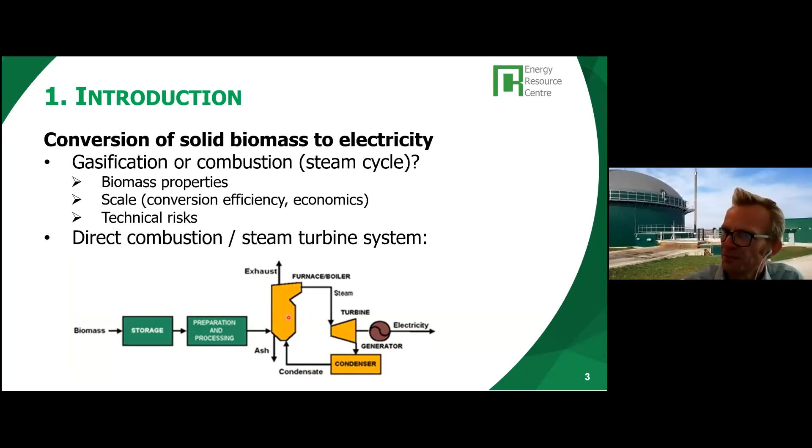First, looking at storage - this is quite important for basically any bioenergy project, particularly solid bioenergy projects, because there's always going to be a need to assure a continuous supply of fuel. In cases where biomass is produced seasonally, for example when connected to agriculture or agro-processing, you may need to store biomass for a longer period, weeks to months. There can be daily fluctuations due to transportation of biomass, which means you always need to have a certain quantity of biomass in stock, so that if there's no supply for part of the day or for a few days, the system can continue operating.

It's important to have continuous feeding of a system, and for that there's often systems for bunkering of biomass, meaning the system is automatically fed from a small storage called a bunker.

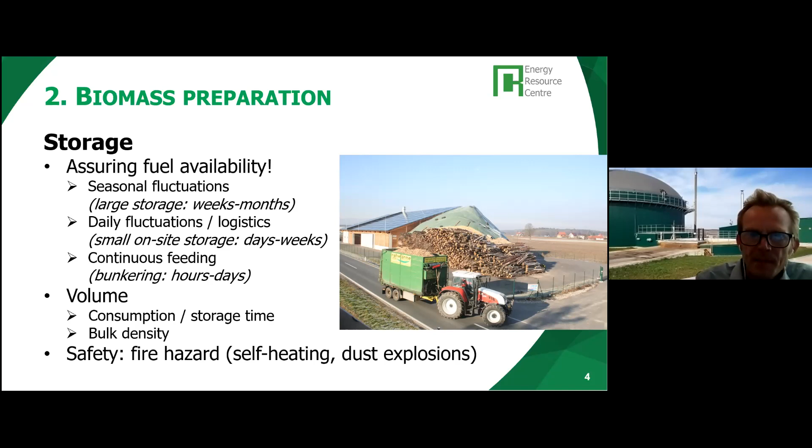Biomass preparation usually involves sizing and drying. Sizing can be reduction of size, for example by chipping of logs or branches of wood, or by milling, which is quite often done in larger scale applications, for example where biomass is fed into coal-fired power plants.

Some systems may also need larger biomass sizes, and when the available biomass is fine and dusty, it could be agglomerated, forming pellets or briquettes, which can then be fed to the combustion system.

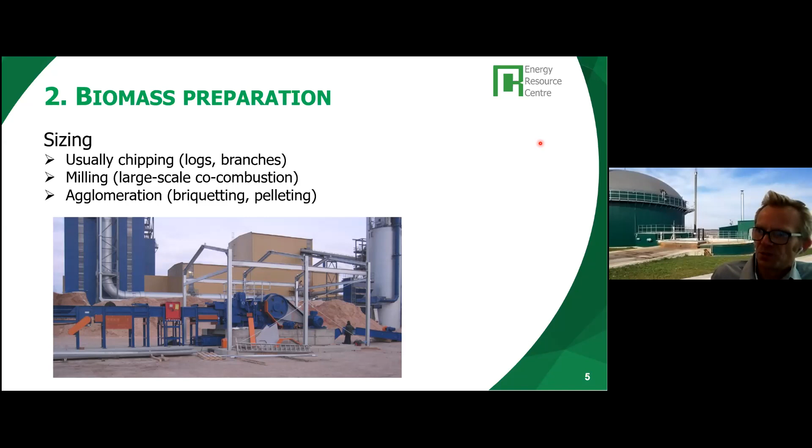Drying is not always needed for combustion systems. Depending on the design of furnaces, very wet biomass can actually be combusted, where drying takes place in the furnace as a first step of the conversion process.

Nevertheless, it can to some extent improve the efficiency, because if you have dry biomass that does not cause too much water vapor to be formed inside the furnace, you can achieve higher combustion temperatures, and you may need less energy for evaporation of the water.

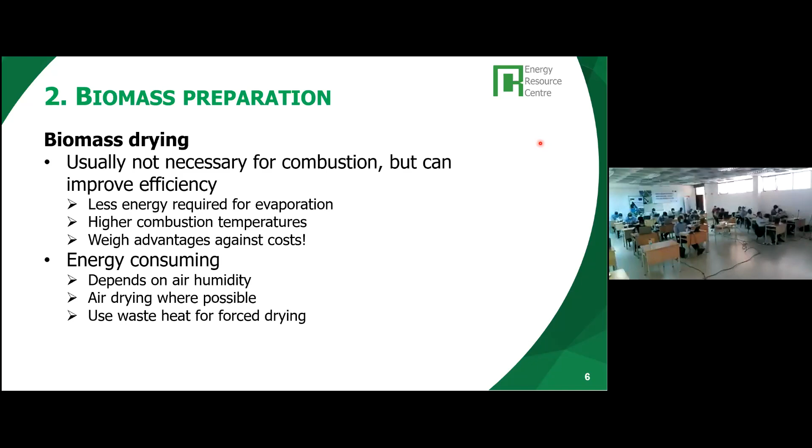It's important to always weigh the advantages of drying against the costs, because having a drying system requires either investments, or in the case of drying in the air, it requires some space to keep the biomass while it's drying.

Consumption of energy for drying: if it can be dried outside, then you don't have to do that much, and you don't consume any energy, but it goes slowly, and it very much depends on the average humidity level of the air. If you have a very high relative humidity, then drying goes very slowly, or even not at all.

If you do consider forced drying, by actual heating or ventilation, then it's best to consider the use of waste heat, for example coming out of the turbine - the low temperature heat that could be made available for drying.

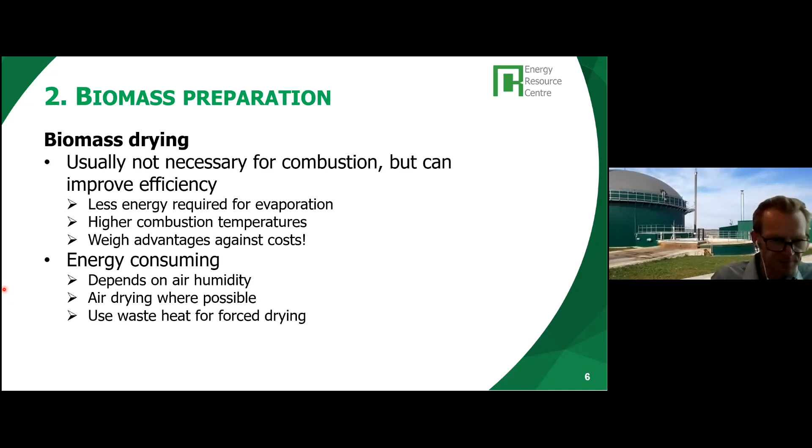The combustion process itself is a thermochemical process, where biomass reacts with an excess amount of oxygen in air for production of heat.

And with the oxygen from the air that is used for combustion, there will also be a lot of nitrogen coming in. As you know, air contains roughly 20% oxygen and some 80% nitrogen, so for every part of oxygen, there will be 4 parts of nitrogen also going into the furnace.

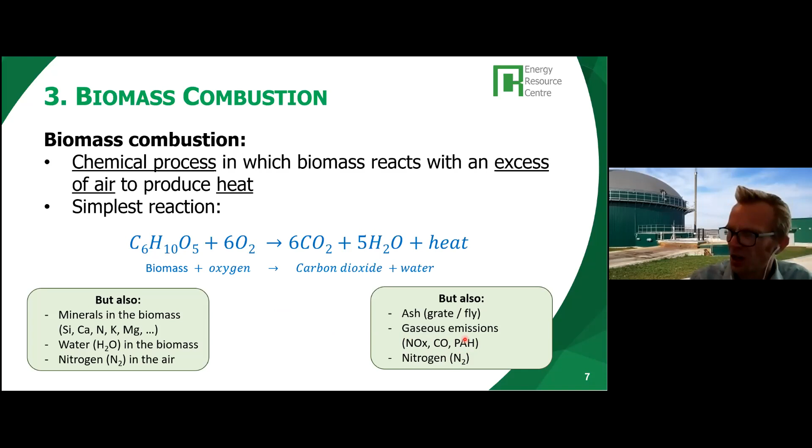Now, what do you see when biomass enters a furnace? First is the heating of the biomass, because when it's admitted, it will basically be at room temperature. What happens more or less immediately is the water it contains will evaporate.

Then the biomass will heat further and will start to pyrolyze, which is more or less the release of the volatile compounds in the biomass, and those volatile compounds will start to burn in the next step. That's the burning gases, the actual flames you see when you look at burning biomass.

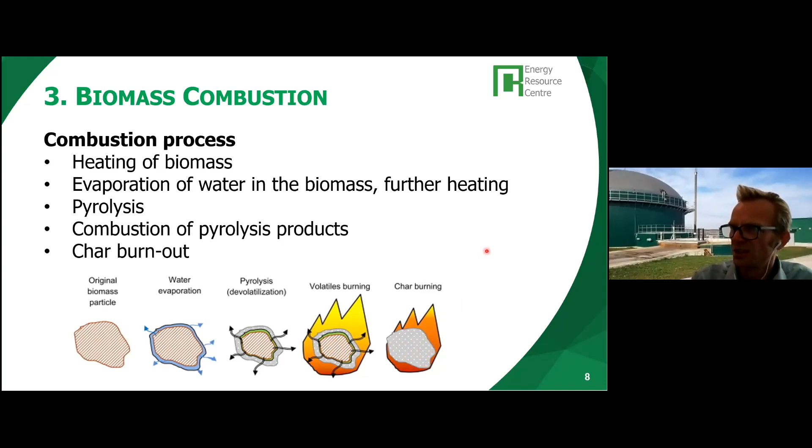Now, at some point, all the volatiles in the biomass will have burnt out, and what is left is char, and that will continue burning. That's more or less pure carbon, and it will continue to react with oxygen to form CO2. That usually takes a bit longer.

Some examples of combustion. We've seen this one in one of the previous slides - that's just cooking, usually 1 or 2 kilowatts of cooking power. A bit larger system.

This is an example for the heating of palm kernels. There you have 10 to 15 kilowatts of heating power for heating these drums with fruits. Similar power, 20, 25, 30 kilowatts, in modern boilers for space heating, used in colder climates.

Some boilers in industries - this is a boiler for cashew shell, around 3 megawatts or so. This is in a palm oil mill in Ghana, I think roughly 15 or 20 megawatts. And this is a large steam boiler in a power plant, 30 megawatts or so.

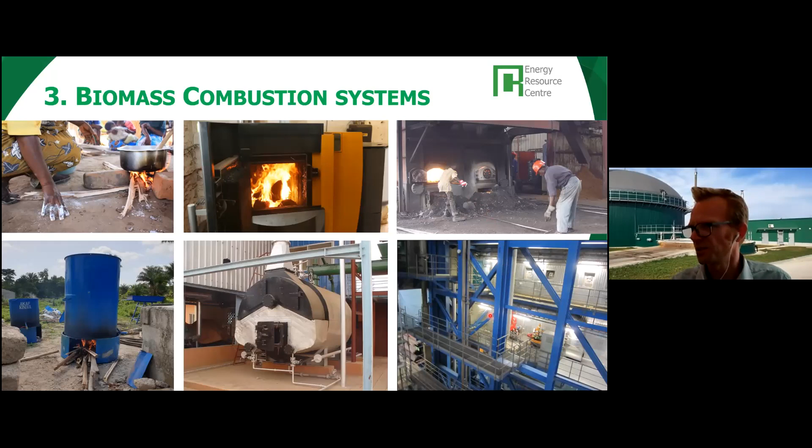What do you see in a boiler? First of all, you'll find more or less optimized conditions for combustion, meaning that the heat is contained within, so that the temperature is high, and the different stages in the combustion process can continue quickly as intended.

The fuel supply is controlled, so depending on the actual energy demands, the boiler output can be controlled by controlling the amount of fuel that is added to it. And the air supply is controlled, so you don't put in too much air, because it can reduce the combustion temperature, but you don't want to admit too little air either, because you get incomplete combustion with emissions and reduced energy output.

Secondly, you get an optimized transfer of heat from the burning biomass, from the flue gases that are produced by the burning biomass, to the boiler water. Boiler water flows through pipes, and we'll have a look at that later. The boiler is constructed such that as much heat as possible is transferred to the boiler water.

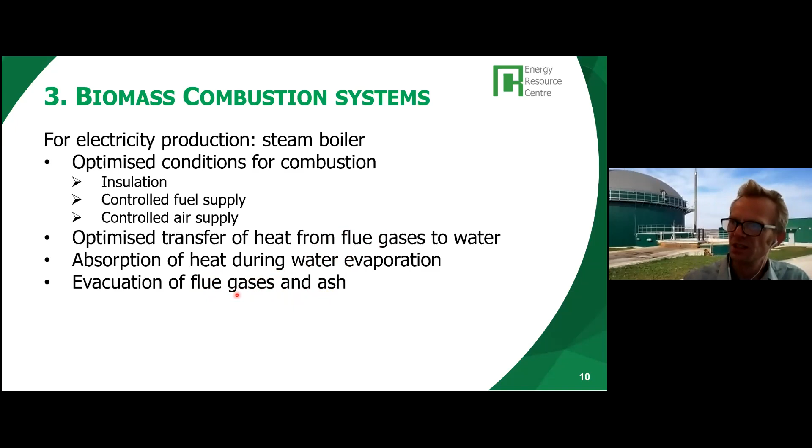And a boiler will have systems for the evacuation of flue gases and ash, both from the grates and also from the fly ash from the flue gas.

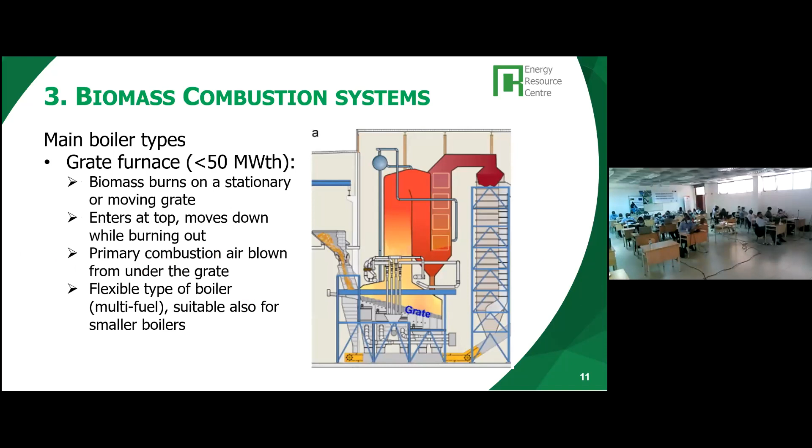There are different types of boilers. We have, on the one hand, for the somewhat smaller boilers - although that might not be appropriate to the higher end of the scale range - grate furnaces, meaning that the biomass is deposited on a grate. It can be a stationary grate for smaller systems, where biomass automatically rolls down as it burns.

We have moving grates, which can be either by moving parts of the grate, which we call a reciprocating grate, so the biomass is each step pushed down the grate system. You also have horizontal grates called traveling grates, which are more or less chain link grates on which the biomass is deposited, and which transport the biomass through the furnace as it burns.

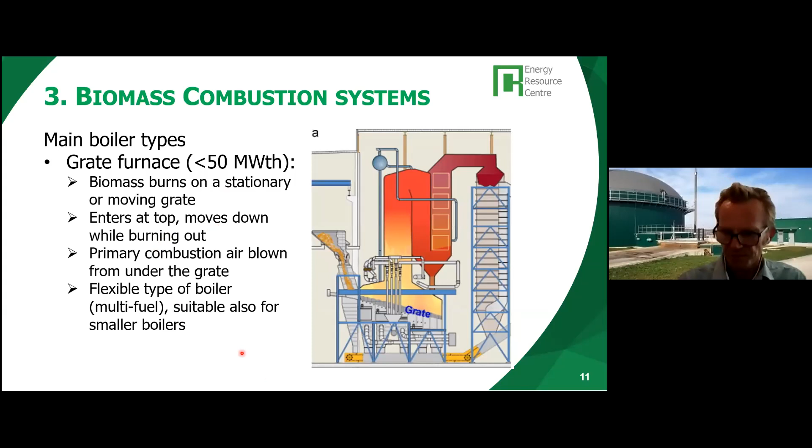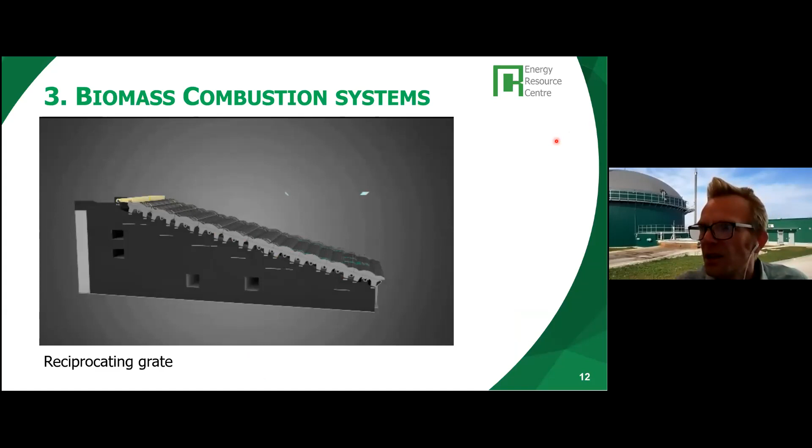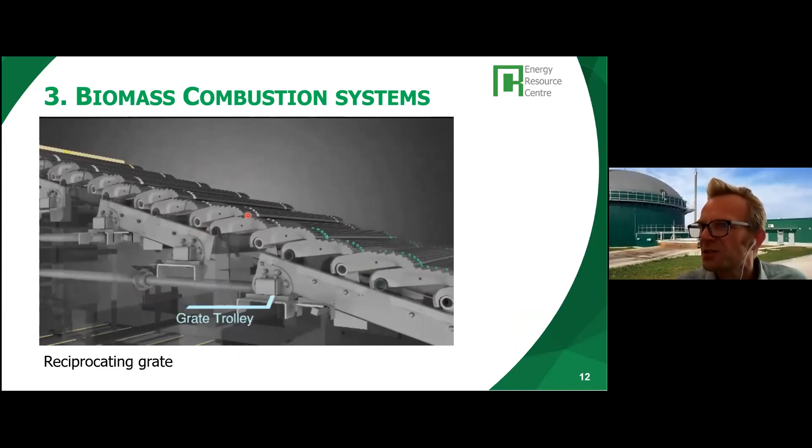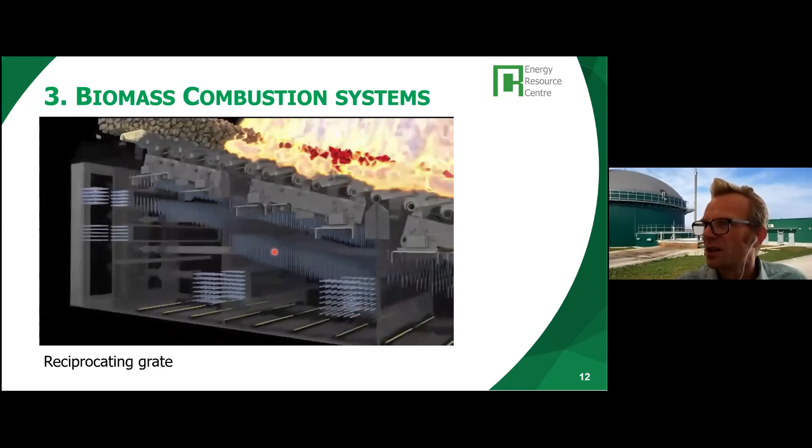This is a small video, I hope that it will be running. Yes, this is a reciprocating grate. You see the different grate parts moving on top of each other, so that once the biomass is deposited on it, these grate parts, as they move in and out, push the biomass slowly down the grate as it burns. You see here the airflow of primary air going through the system, and here you see the drying biomass. You see the pyrolyzing biomass, and further down you will see the burnout of the char.

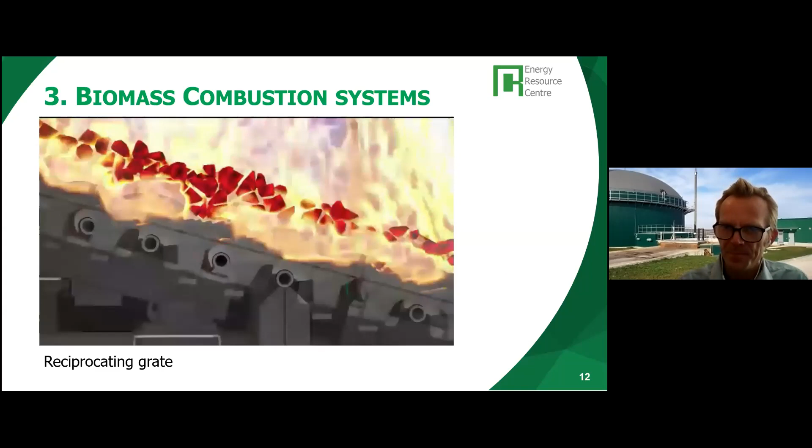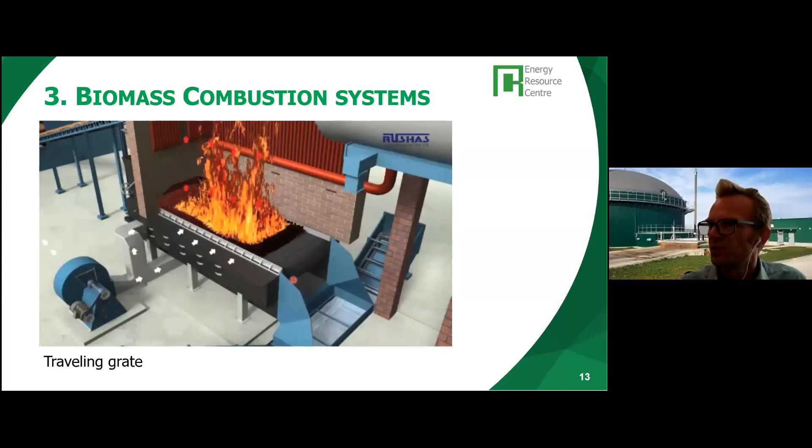And this is an example of a traveling grate. That's more or less a horizontal grate. Biomass is deposited here, just outside on top, and this rotating grate moves very slowly. You see it here as a chain, and the biomass is transported through the furnace as it burns, and the burnt out char and ash end up at the end of the grate, deposited on an ash removal system.

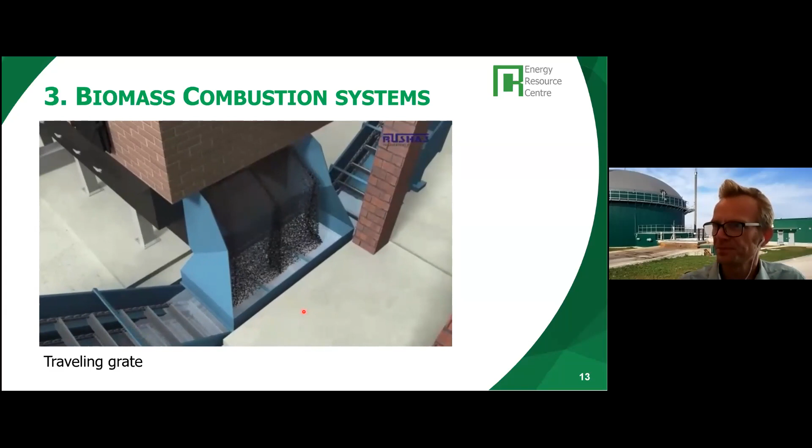Another type of boiler, in the larger segment from about roughly 10 megawatts upwards, is called the fluidized bed boiler. What is meant by fluidized bed is that the biomass actually combusts in and on a bed of inert material, which can be sand, for example, which is brought into suspension by an airflow blown from under.

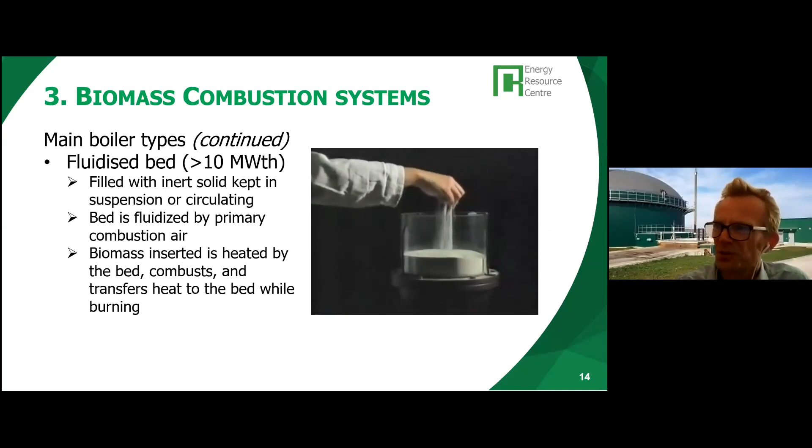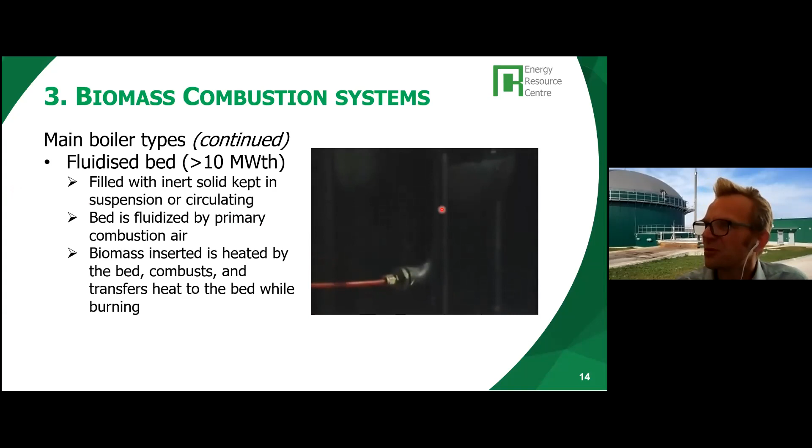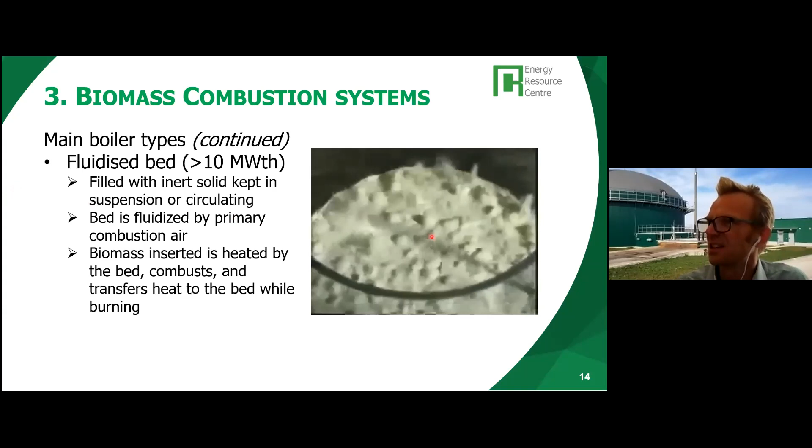This is a small video that shows it. It starts behaving as a liquid, more or less. It is sand, but because there's air blown under it, it sort of starts to float. By having the right velocity of the air, the bed is kept in suspension here. Once this is achieved, the sand can be heated up, and then once biomass or other fuels are fed into it, the heat from the bed very quickly heats the biomass that enters, making sure that the different combustion steps of the biomass are followed.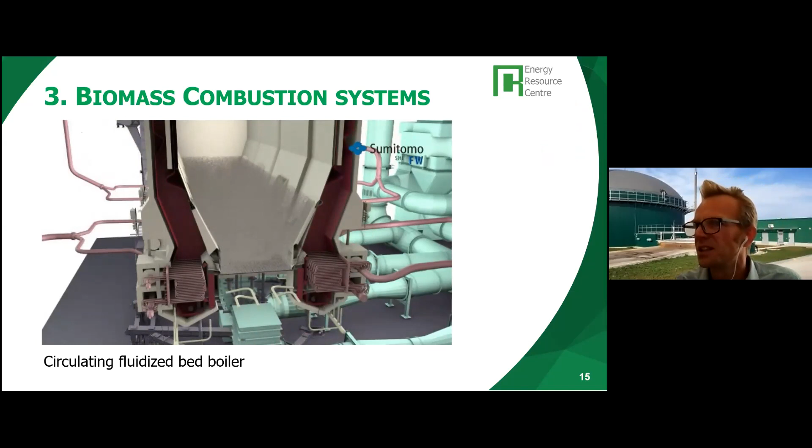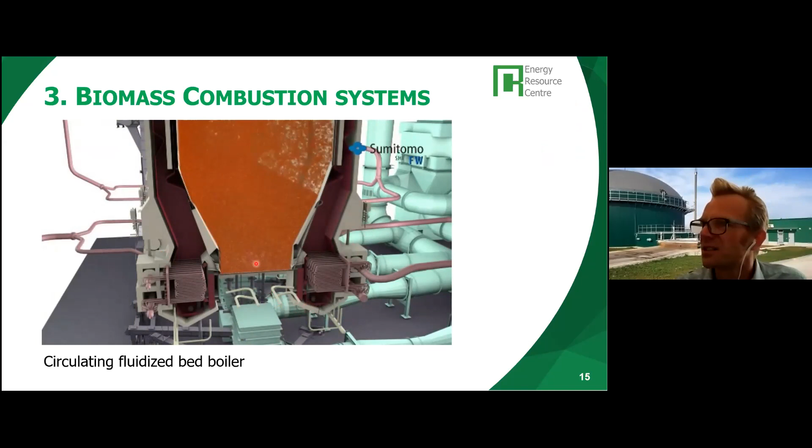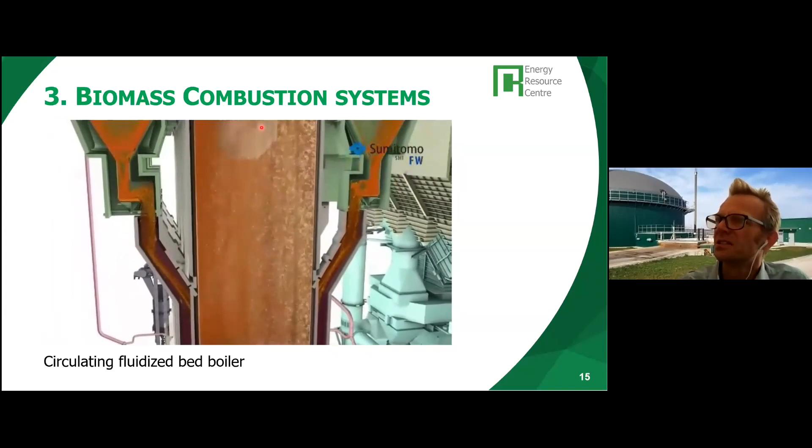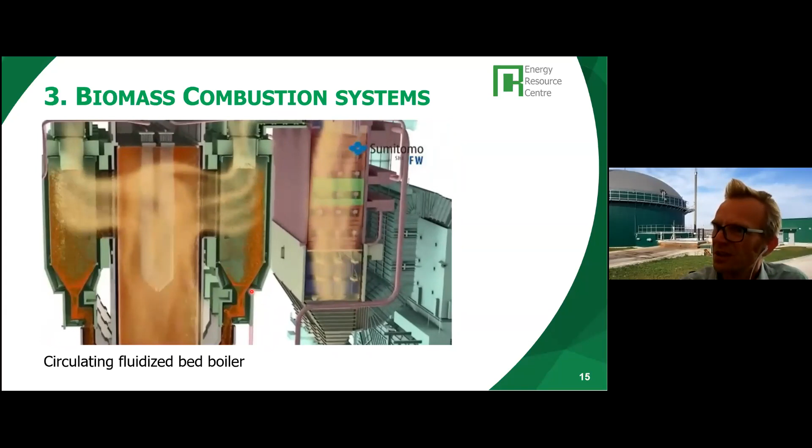This is a so-called circulating fluidized bed boiler, meaning that the speed of the air that's blown in is a bit higher, so that the bed is actually lifted up and goes all the way up in the furnace, over the top, and enters here in cyclones, where it is separated from the flue gases. Then the bed particles return back down to the bottom of the furnace, where they are re-entered into the boiler. See them here going down.

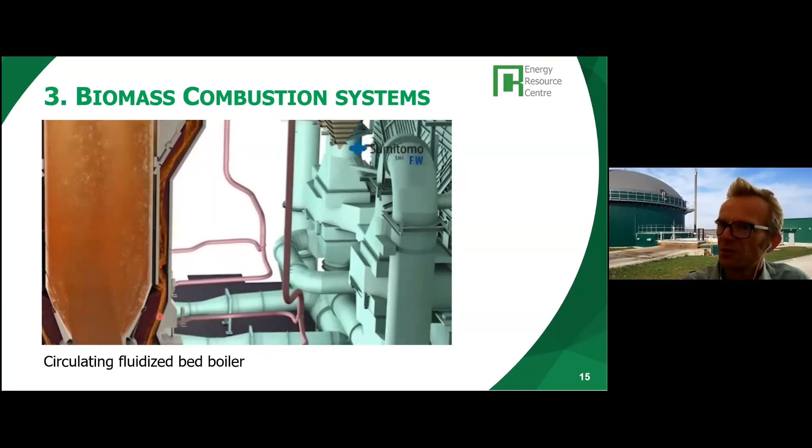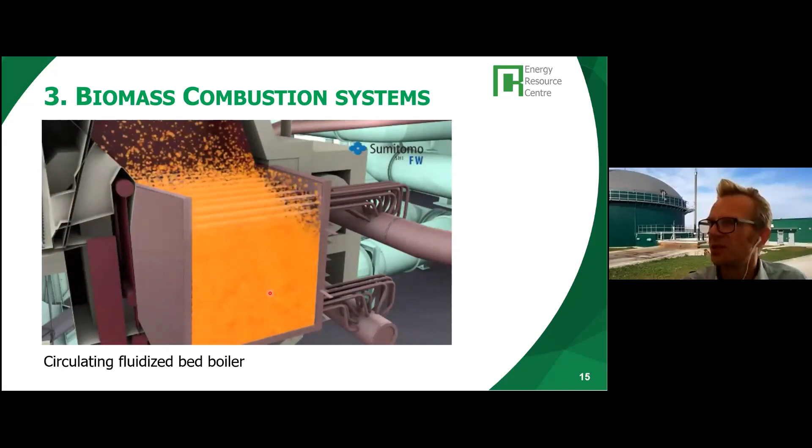Then there's further heat exchange between the hot bed and the steam system. The fuel is injected from the sides as it burns. Flue gases go over the top. So the main heat exchange is between the bed and the water tubes in the boiler walls, and then it passes through the superheaters and economizers at the end.

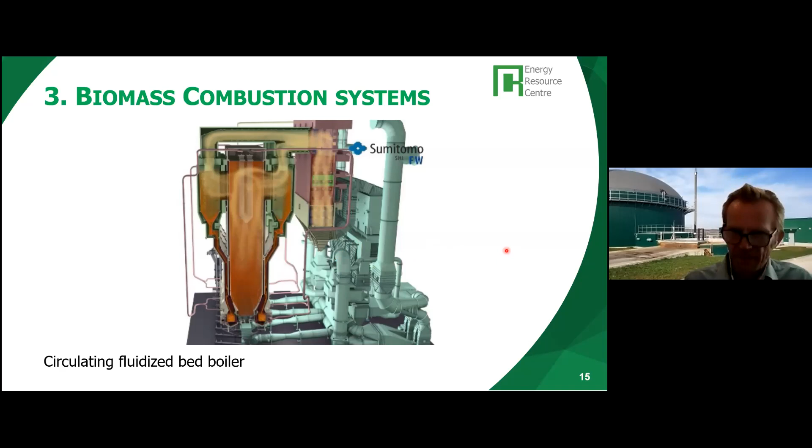Now the heat transfer in steam boilers, in most cases, especially larger high pressure steam boilers, the water is contained inside tubes, and the fire of the combusting biomass, or the flue gases, are on the outside. The water tubes are typically contained in the boiler wall. This also prevents the boiler walls from melting if the combustion temperatures inside the boiler are extremely high.

Inside the water tubes is pressurized water, because of the higher pressure the water evaporates at higher temperatures, typically a few hundred degrees centigrade. Then you have the transfer of heat from flue gases to the water tubes, either by radiation, or by a combination of radiation and convection. So hot flue gases pass the colder surfaces of the boiler walls, and then the flue gases go further down the boiler, passing superheaters for increasing the steam temperature, and in the end passing through an economizer for preheating the boiler water.

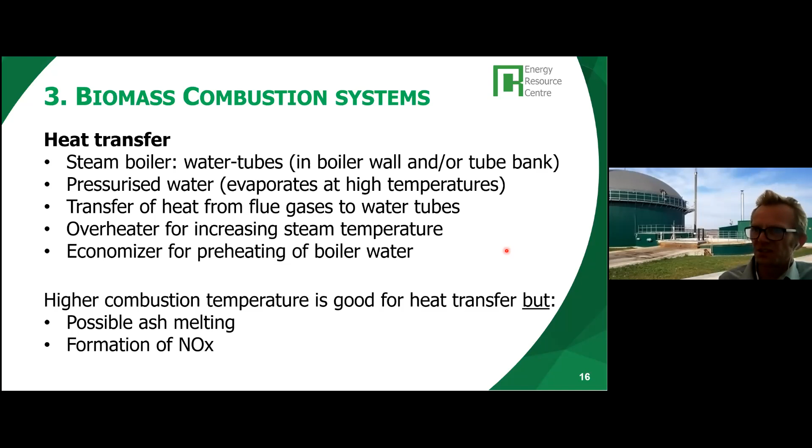Secondly, at higher combustion temperatures you get formation of nitrogen oxides. That's something to be avoided, because it's environmentally damaging, causing acid rains. It's an emission that must be avoided, and if it cannot be avoided, it should be removed from the flue gases.

Just hold on. This is a nice video showing the passing of the boiler water through the system. Let me see. It does have sound, I hope you can hear it. Just a moment.

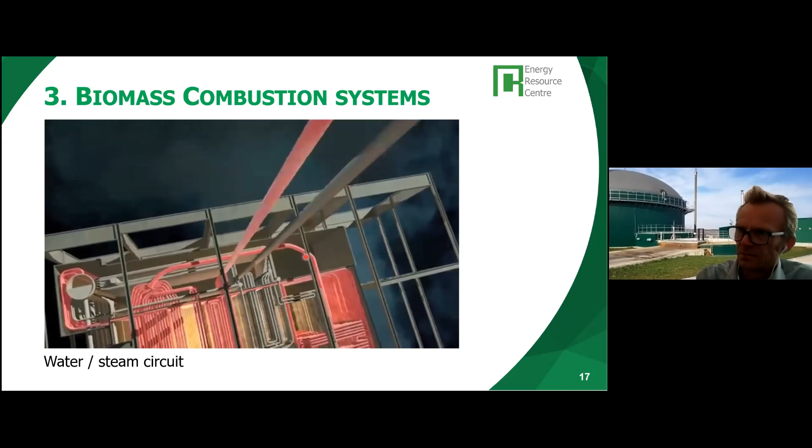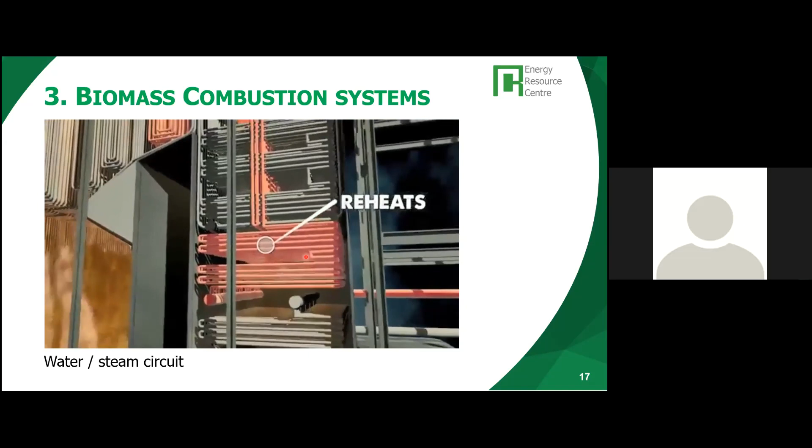So actually, this reheating that's mentioned is not for all systems. It depends whether there's, let's say, a need for reheated steam in the boiler and turbine layout.

Now the flue gases, as they come out of the boiler, might need cleaning. First of all, because there might be quite substantial amounts of fly ash contained within it, and that's the very light fraction of the ash that is carried away by the flue gases through the boiler and to the stack. They need to be removed as much as possible because they contain the heavy metals included in the biomass, which is damaging to the environment and also to humans when inhaled.

Fly ash removal is usually done in different stages. Modern systems, let's say all systems, usually have a cyclone system, a multi-cyclone system that separates solids from the gas by centrifugal force. The flue gas is brought into rotation inside a cyclone, and the solids in the gas are pushed to the outside, while the gases can go out of the top of the cyclone. Multi-cyclones usually remove roughly 80 or 90% of the fly ash.

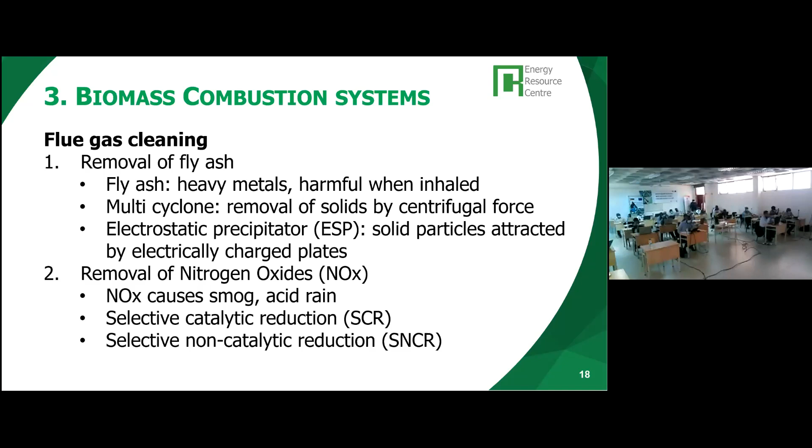In modern systems, this is usually followed by an electrostatic precipitator, in which the solid particles are electrically charged by an electric field and then attracted by the charge plates, thereby separated from the flue gas, with more than 99% removal efficiencies. There are other types of filters that can be put after that. For example, fabric filters can take out even the last, smallest parts of the fly ash.

Secondly, as indicated, if there are large amounts of nitrogen oxides in the flue gases, this should be removed, depending on the regulations for the amount of nitrogen oxide that can be emitted. It can cause smog, which is a problem mainly in urban areas, but also acid rains, which is a general environmental concern. There are different techniques available for removal of nitrogen oxides, catalytic or non-catalytic.

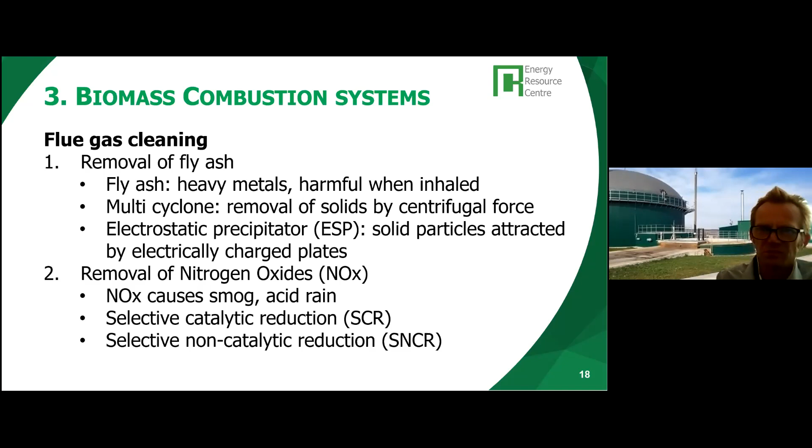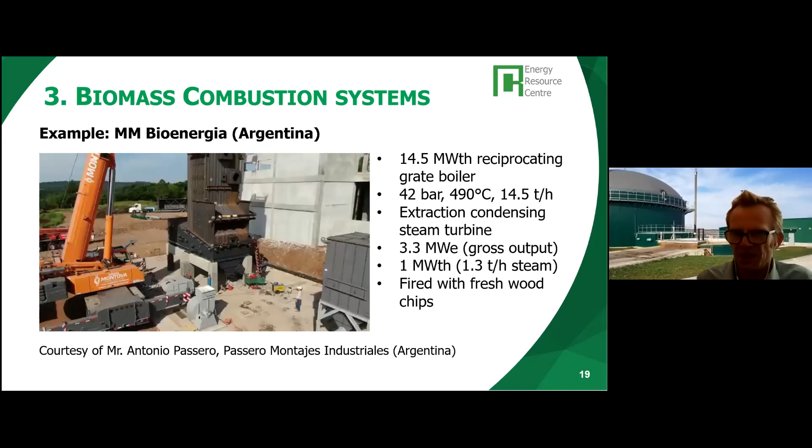Before we take a break, I'd like to show an example that I found from someone I know from LinkedIn. I know he's involved in the construction of a bioenergy plant, a 3.3 megawatt plant in Argentina. A month ago they were in the process of constructing the boiler, a reciprocating grate boiler, horizontal type, and there's a nice little video for that as well.

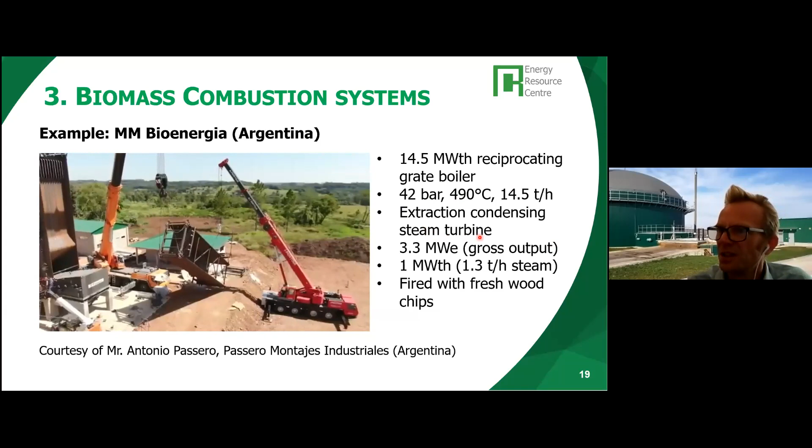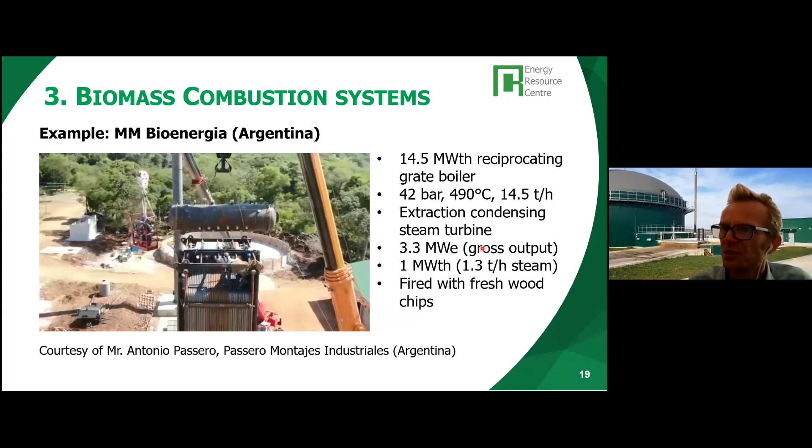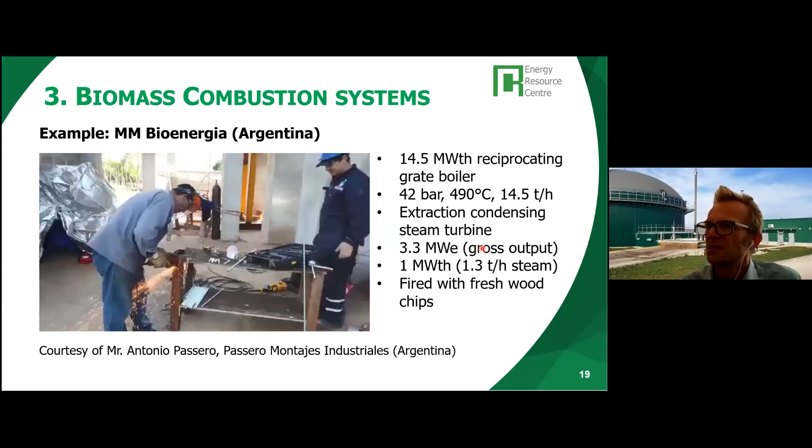So this is, you see the sloping grate, which is typical for the reciprocating grate. You see the boiler walls being erected with the steam tubes on the outside. That's the steam drum being put on top. It's interesting to see the size of the boiler in relation to the people working on it, and the overall installation.

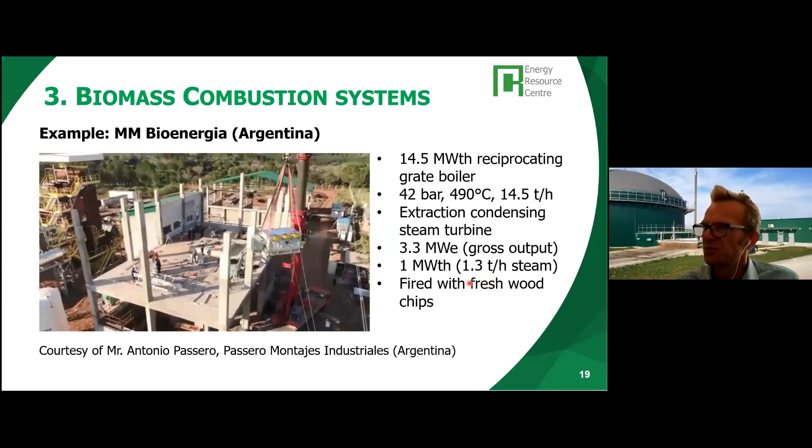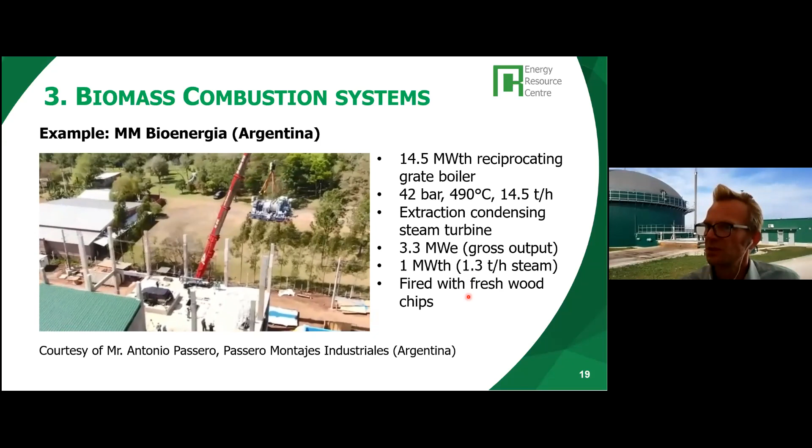It's a system that produces electricity and a limited amount of steam as well, at 2 bar. We'll have an extraction condensing turbine for the production of electricity. That's it, the turbine being installed. The system will be using fresh wood chips.

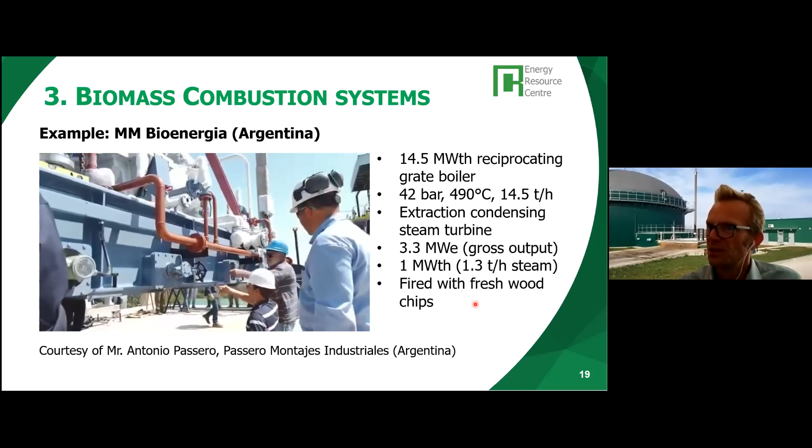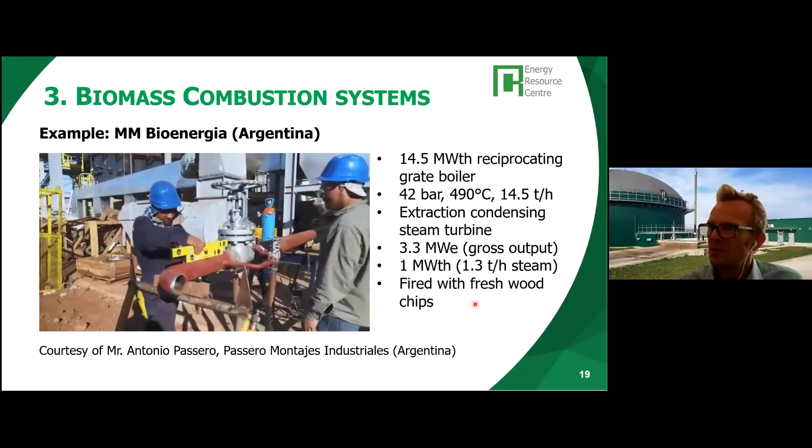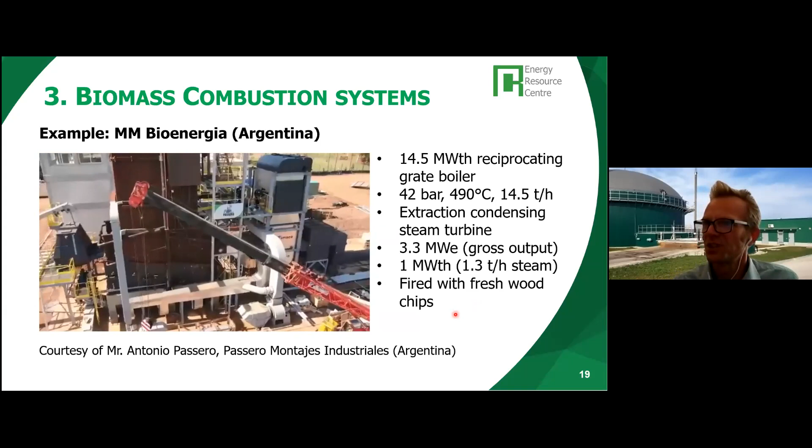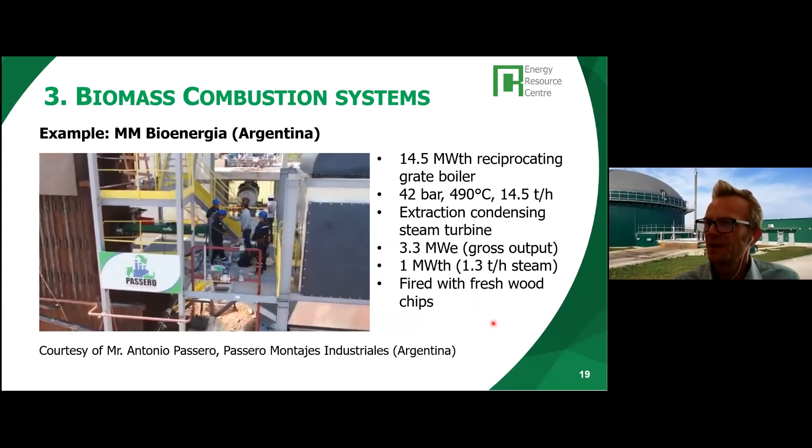I'm not sure when they will finalize the system, but I think it should be taken into operation early next year. I'll check with my contacts on the progress they are making. This video is about one month old, so by now they should be nearing completion.